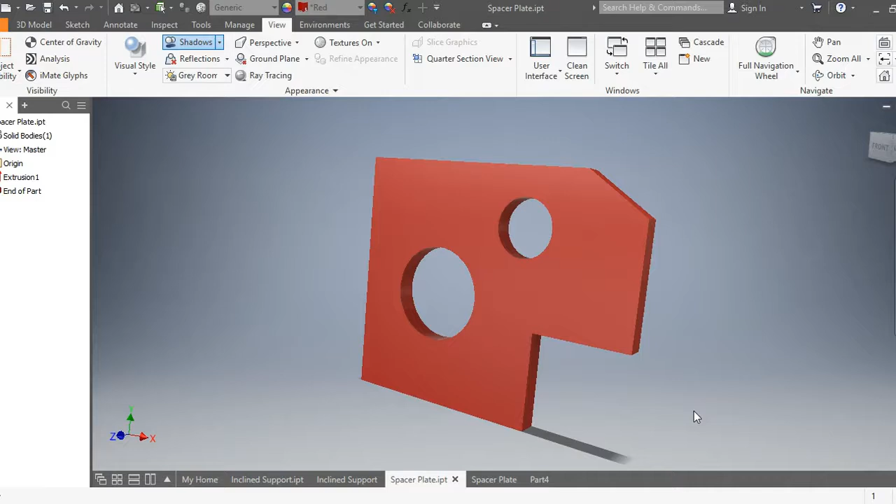I'm going to open up a new part file. And I've gone ahead and brought in the dimensions we'll be using today so I can use them for reference.

First, I'm going to go ahead and start with this vertical line, 6.5. Start at the origin and go up 6.5. And then you notice how I can go across 6.5 as well.

And there's a little slant right there that I don't know the size of, so I'm going to go ahead and leave that as is for now and work my way around the other way.

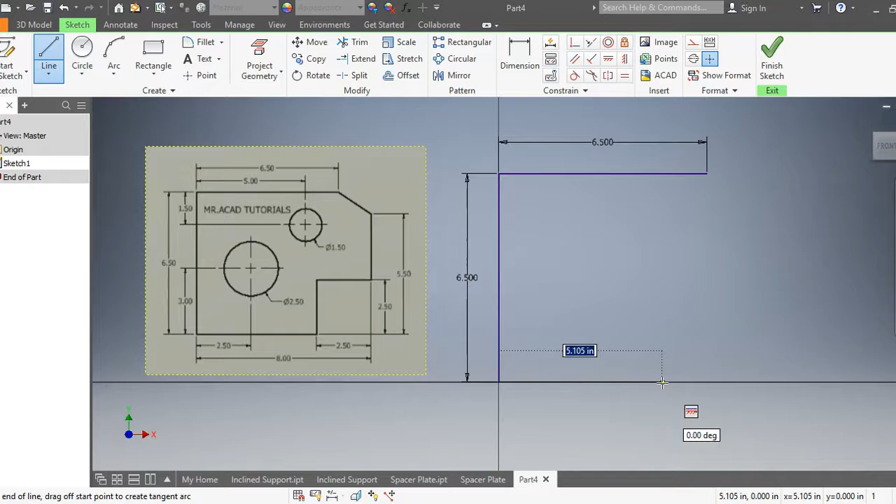So I'm going to start a line command again. Now start from the bottom and go to the right 8. Actually, it's going to be 8 minus 2.5, which if we do a little bit of math, 8 minus 2 is 6, minus an additional 0.5 is 5.5.

And then I'm going to go up 2.5, go across 2.5. And you notice I don't know the length of this vertical line either, so I'm going to go ahead and just create a vertical line there and create a slant.

And you've noticed that this slant here is green, which means that not everything is constrained yet. So I have to make sure everything's dimensioned properly.

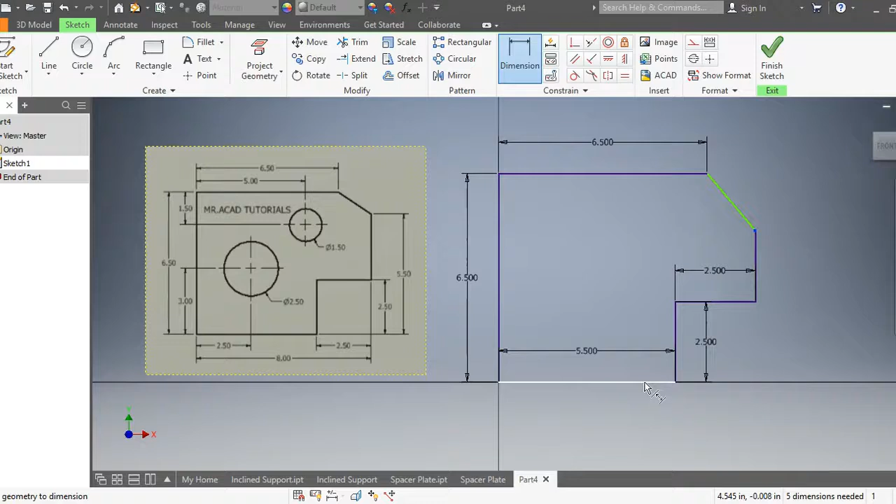I'm going to go ahead and dimension now from this point right before the slant all the way down here. This needs to be 5.5.

Then also, let's see, do I have all dimensions? Now I'm going to go ahead and draw the circles. Everything else has been dimensioned. I can go ahead and dimension this right here.

Right here should be 8. And if I place it right there, it's going to say it's already over constrained, which I've already decided since this is already 8 inches when I constrain everything else. So we know that's 8 inches.

Everything else looks good. Now we're going to go ahead and move this dimension down a little bit so that I can focus on the circles.

For the circle, I'm going to go ahead and go to the circle command up here. And I'm going to draw 2 random circles. Right now it really doesn't matter the placing. We'll go ahead and worry about the placing a little bit later.

First circle is going to be 2.5 inches in diameter. And the one up here is going to be 1.5.

Now is whenever I really worry about the spacing. So now I'm going to go ahead from the top to the center of the circle. I can click on just a circle, I don't have to click on the midpoint. Click on the circle. It's going to be 1.5.

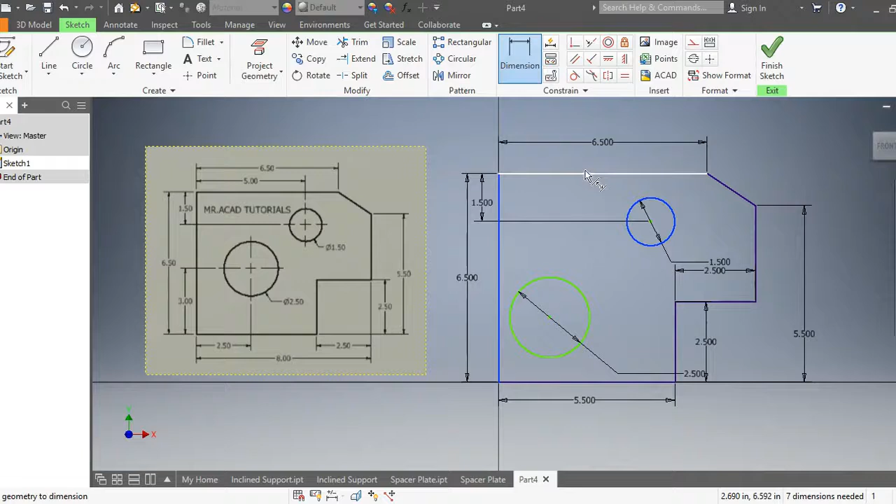And then from this vertical line to the center of the little circle is going to be 5. You can see how it automatically moves it to the proper place.

Now from the circle to the bottom part right here needs to be 3 inches. And then from this vertical line to the center of the circle needs to be 2.5 inches.

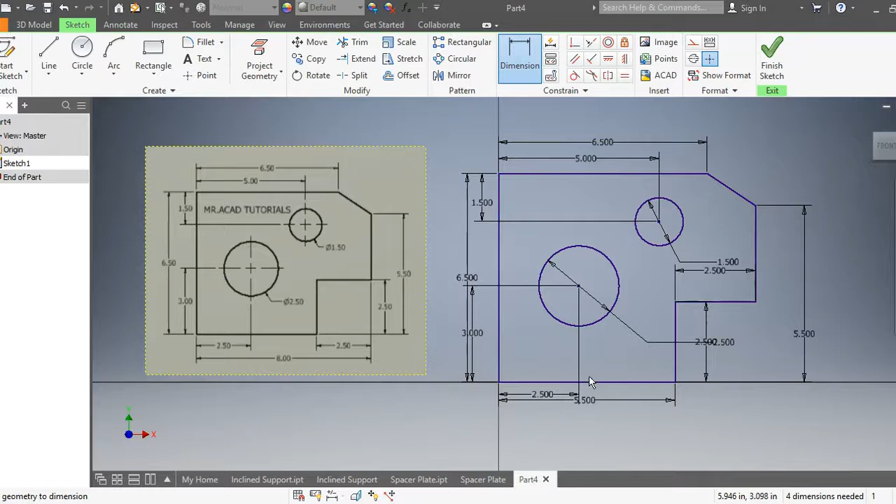But now that everything's blue, which means everything's fully constrained, I can go ahead and finish my sketch.

And when I extrude this, the image is going to go away because it will get consumed with my sketch 1. Let's go ahead and extrude it 1 inch. Press OK.

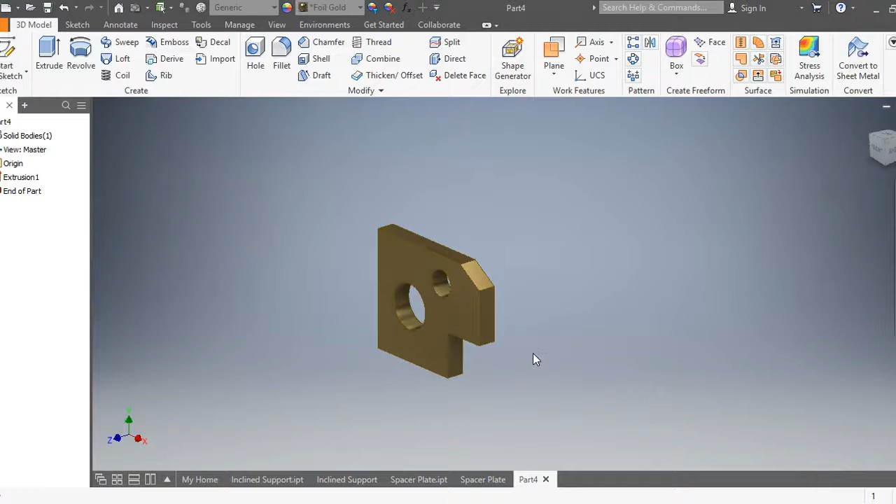Change the color. And then there it is.